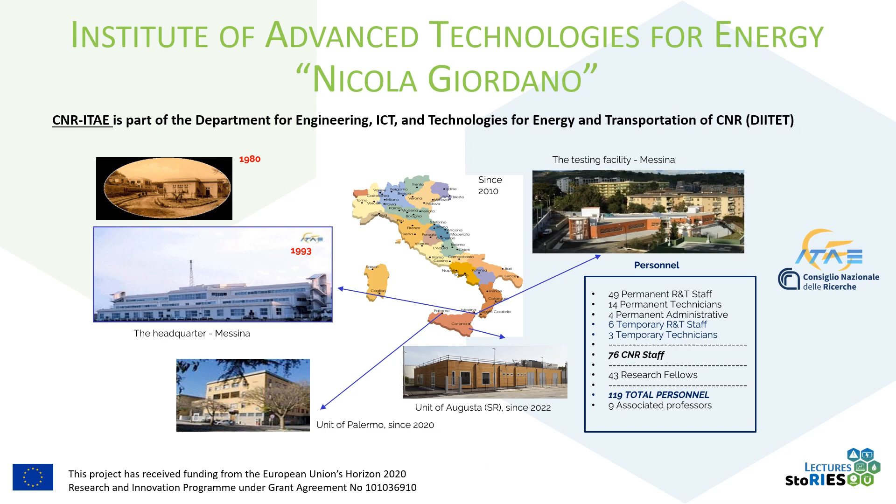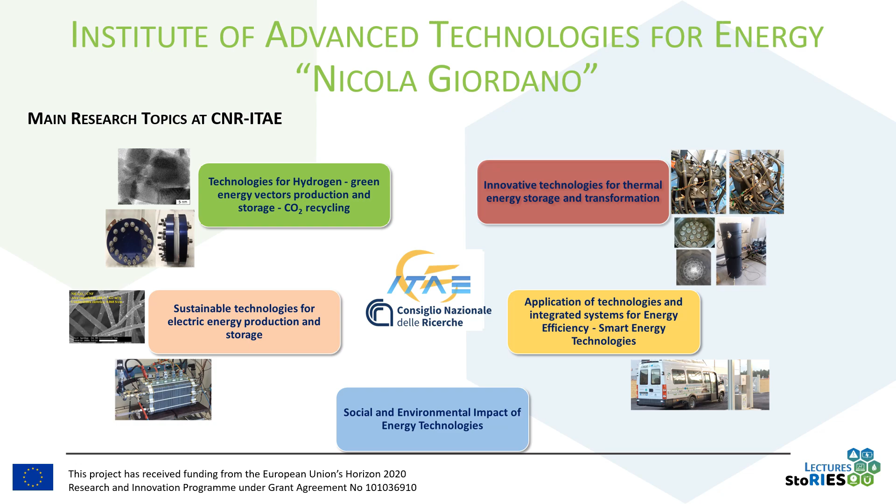Our institute is dedicated to advancing research and innovation in the energy sector. Its activities focus on the development and optimization of sustainable energy technologies, including hydrogen production, CO2 recycling, fuel cell, energy storage solutions, and social and environmental impacts. The institute is active in many research projects in the framework of European, national, and regional research programs in the area of clean energy.

Now let me give you some very little information on my research team. Our activities are developed within the framework of two main topics: chemical energy storage, carbon dioxide recycling, and hydrogen carrier, and hydrogen production from fossil fuels and renewable fuels like biogas, bioethanol, ammonia, and methanol. We are involved in the intensification of thermochemical processes in general, and we are also involved in several projects, European, national, and regional, in which we develop catalysts, especially structured catalytic systems like 3D printed catalysts. We developed also reactors and we scale up also catalysts, and finally we develop also prototypes. I'm the head of this team, and do not hesitate to contact me for further information.

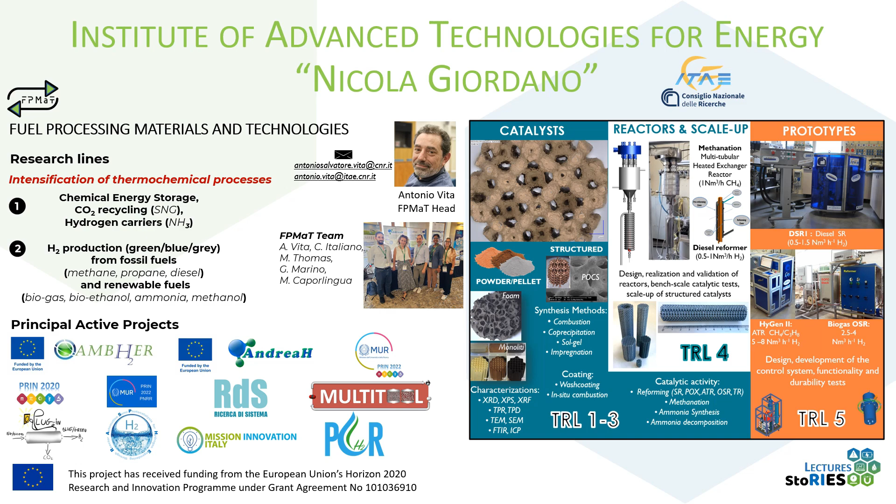The demand for energy is growing across many countries in the world as people get richer, and especially as population increases. If this increased demand is not offset by improvement in energy efficiency, then our global energy consumption will continue to grow year on year.

A breakdown of global energy production by source shows that today fossil fuels still account for the majority, around 77% more or less of global energy comes from oil, coal, and natural gas. Despite the increasing focus on cleaner sources, the contribution of renewable energy now accounts for around 20%. Instead, nuclear energy represents roughly 3% of the total.

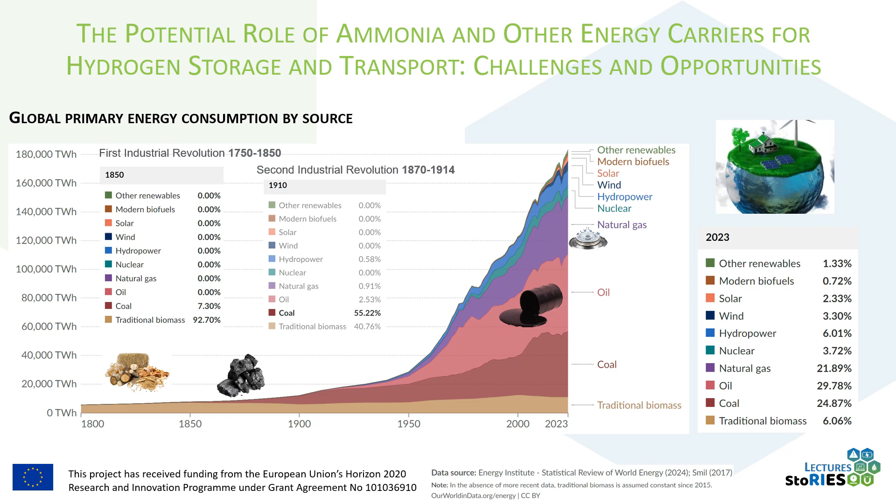So we can say that human activity is responsible for the vast consumption of energy, primarily from fossil fuel, leading to significant pollution and environmental degradation which intensifies climate change. It's widely recognized that to avoid the worst impact of climate change, the world needs to urgently reduce emissions. But how this responsibility is shared between regions, countries, and individuals has been an endless point of contention in many international discussions.

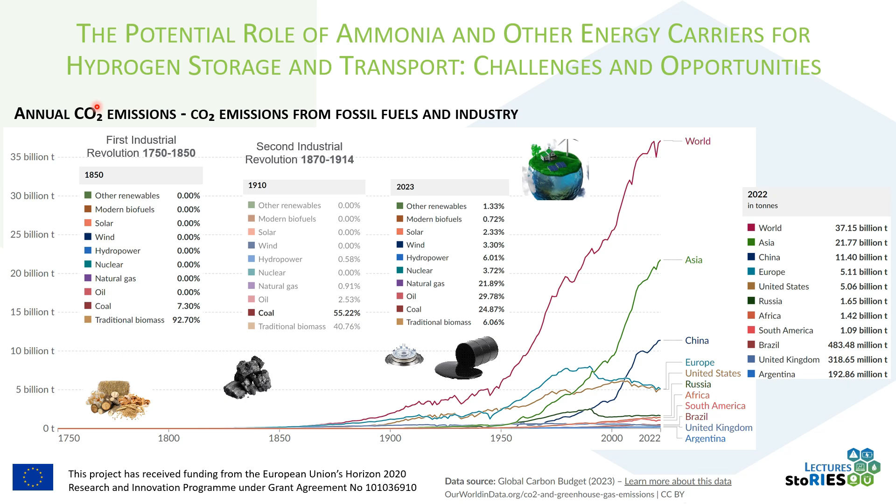The European Union aims to be climate neutral by 2050. With this sign, the European Union will lead the way by investing in clean technology solutions. The window to reach zero emission by 2050 is quickly closing, but there is still time for the world to get on track. If decisive action is taken now, if we want to reach net zero, we need to stop using fossil fuel and cut emissions right away across the world's global energy system, including power, transport, industry, and buildings.

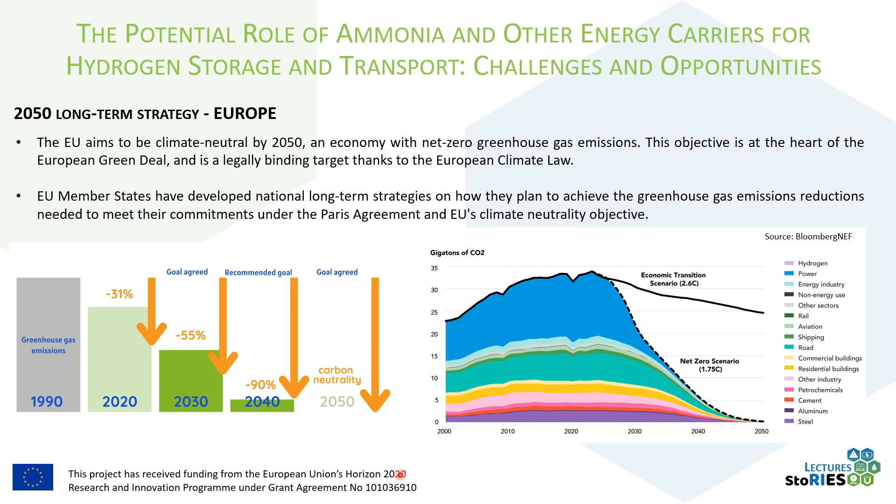There is no doubt that renewables are the future of power generation in Europe and worldwide. Reaching net zero depends on tripling renewables capacity by the end of this decade. We can say that the era of fossil fuels is ending or near to end. Even if the transition is driven by economic aspects alone, renewables could still generate 50% of electricity by the end of this decade.

Continuing to move away from fossil fuels will also require investment in clean technologies to accelerate the adoption of renewable energy sources and the removal of carbon dioxide from the atmosphere for storage and use in industrial processes.

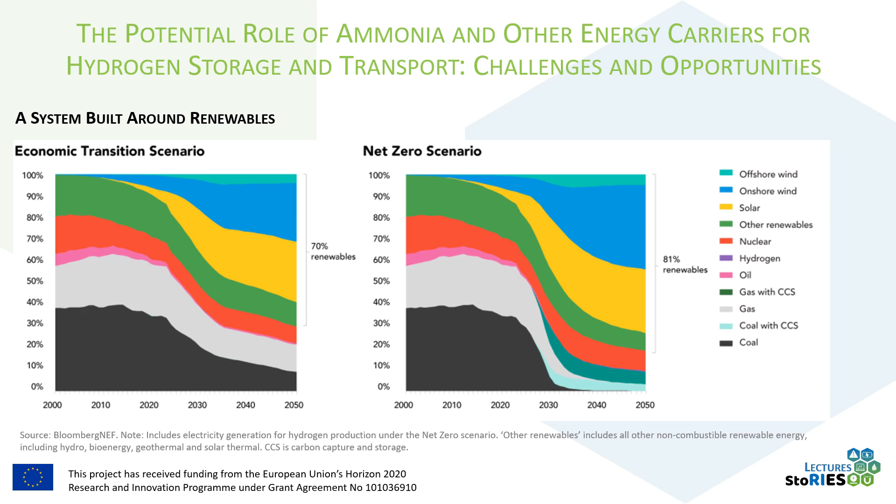Most renewable energy power generation is location dependent. Renewable electricity generation is sensitive to weather conditions, and guaranteeing the amount of energy produced at any given time is a challenge. Intermittency highlights the need for energy storage solutions.

Batteries, for example, are required to collect energy during peak production periods for distribution in a controlled, consistent manner during periods of low or non-production.

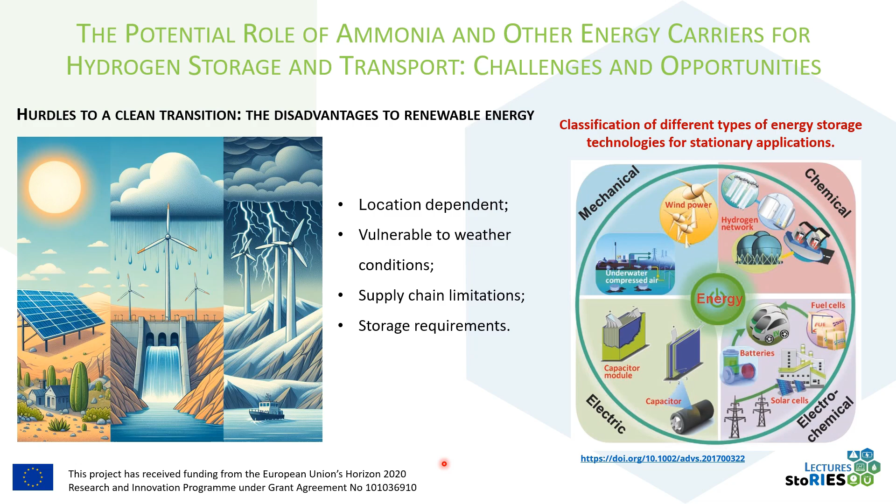But also chemical storage, via molecules like hydrogen and hydrogen derivatives such as ammonia, methanol, and methane, can play a key role to manage excess energy and use part of the carbon dioxide sequestered.

Chemical storage can add power into the grid and store excess power from the grid for later use. We are talking about power-to-gas or power-to-liquid technologies. For instance,

a way to stabilize the energy sector could be to use water electrolysis to produce hydrogen in periods with excess electricity production. Then the hydrogen could be used for applications to decarbonize industry, transport, heating, and power generation.

On the negative side, the major challenge for the direct use of hydrogen as an energy carrier is the low volumetric energy density.

But hydrogen can be used in the synthesis of other storage molecules with higher volumetric hydrogen storage density and higher gravimetric hydrogen storage density, like, for example, ammonia and methanol, that can be stored and transported for application in industry, transport, heating, and power generation sectors.

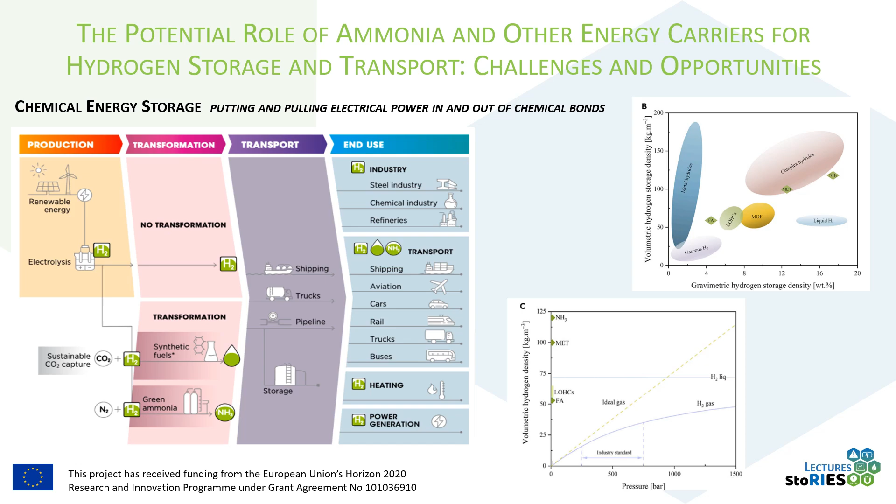As just said, the renewable power is intermittent and thus not always available when needed. Consequently, we need tremendous conversion and storage capacity in order to have a continuous energy supply. Direct electrification is the best option for energy conversion efficiency and zero tank-to-wheel emissions, but the low energy density of battery electric storage systems make them unsuitable for large energy storage, such as in the maritime sector.

Direct use of hydrogen, either in compressed or liquefied form, has some advantages. One of them is the fact that it requires a less complicated fuel production process. But even in its liquid form, hydrogen has a relatively low energy density compared to other synthetic fuels.

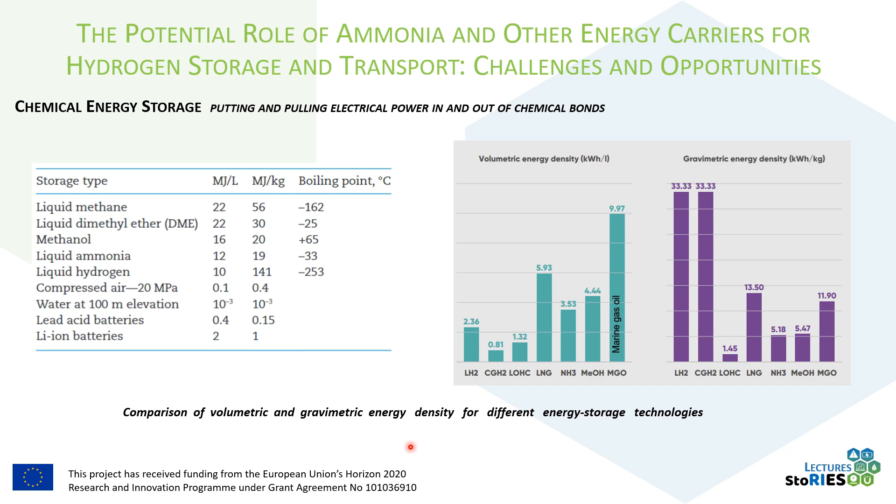The maritime sector offers a scenario in which these emerging carriers can be compared. Hydrogen, ammonia, and methanol, for example, have been proposed as promising energy carriers that would replace part of the liquefied natural gas in future maritime scenarios.

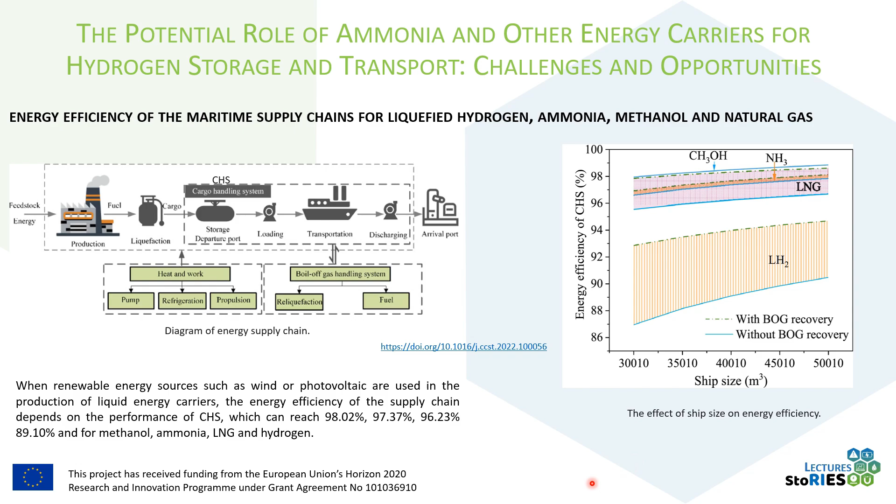In the next slides, I'm going to give details on ammonia: applications, properties, synthesis, and production costs.

Ammonia has a very high hydrogen density, approximately 121 kilograms of hydrogen per cubic meter, in liquid form at minus 33 degrees centigrade under atmospheric pressure. This value is higher compared with other potential carriers like methanol or liquid hydrogen.

Many experts suggest that using ammonia as a temporary vector for hydrogen will be needed to overcome the storage and transport challenges associated with hydrogen.

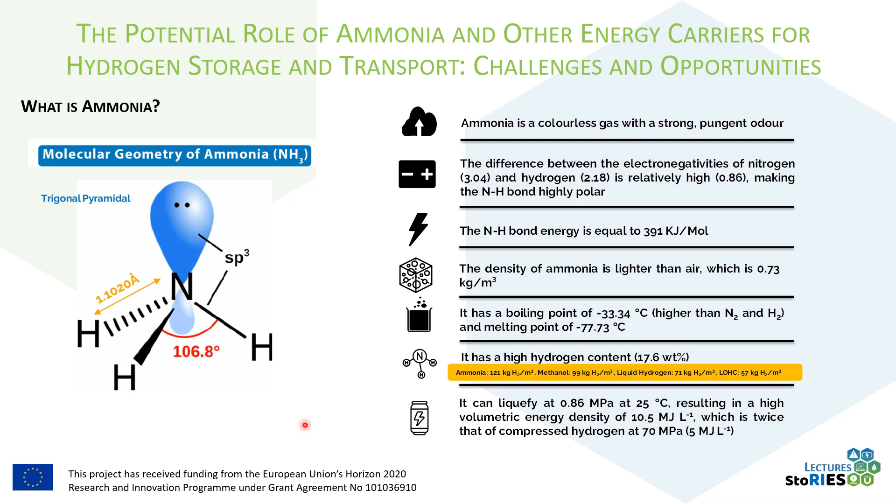Today, about 80% of the annually produced ammonia is used for fertilizer production. But ammonia is also used for the textile industry, explosive industries, and cosmetic industry.

Ammonia production normally increases with the increase of population, and in the future ammonia production will increase much more, driven by economic and population growth. This number will increase even more if we consider the application of ammonia in the energy sector as an energy carrier.

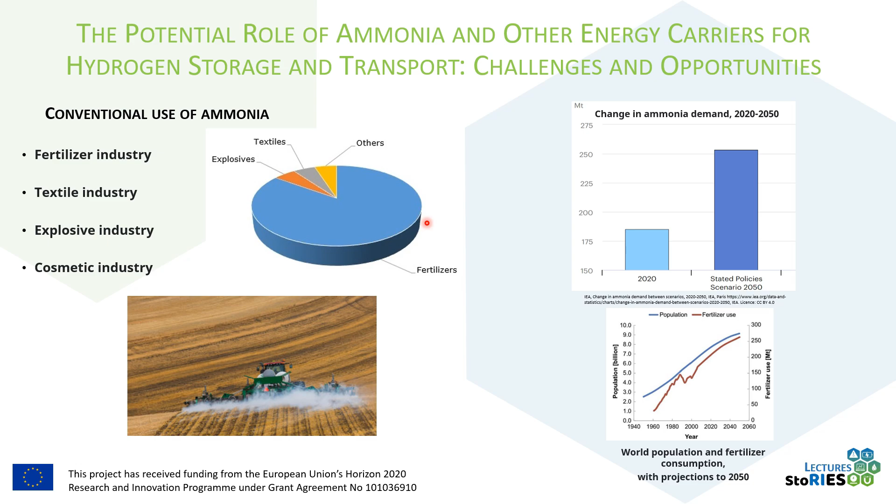China is the largest producer of ammonia, accounting for 27% of production. Then we have other countries like the United States, European Union, India, and Russia, that produce about 10% of ammonia.

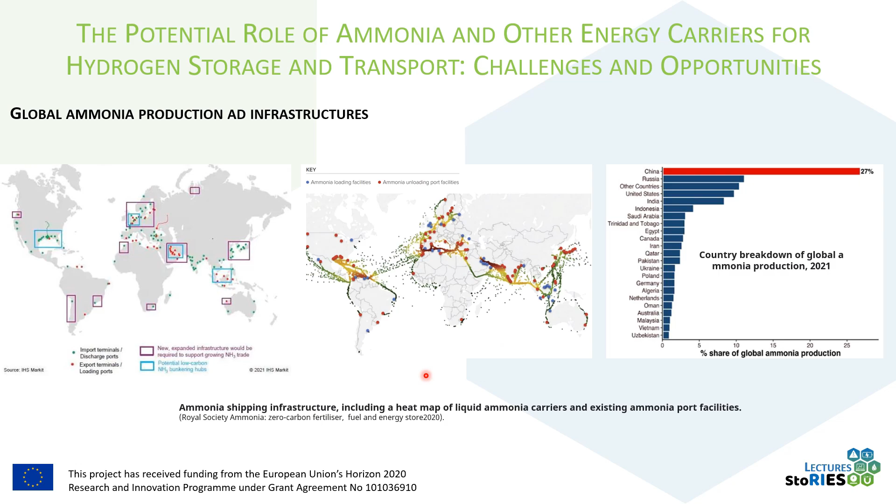One of the advantages of using ammonia as an energy carrier is the well-established international existing infrastructure for ammonia transportation and storage. There is a comprehensive network of facilities around the world that can handle ammonia on a large scale. This well-established infrastructure can also be used to transport ammonia for energy application.

The Haber-Bosch process is the primary method for producing ammonia from nitrogen and hydrogen. Fritz Haber and Karl Bosch, both Nobel Prize winners in chemistry, worked together more than 100 years ago to develop this important process. Fritz Haber was the first to demonstrate the process at lab scale, working with high temperature, 500 degrees centigrade, and high pressure, between 150 and 200 atmospheres.

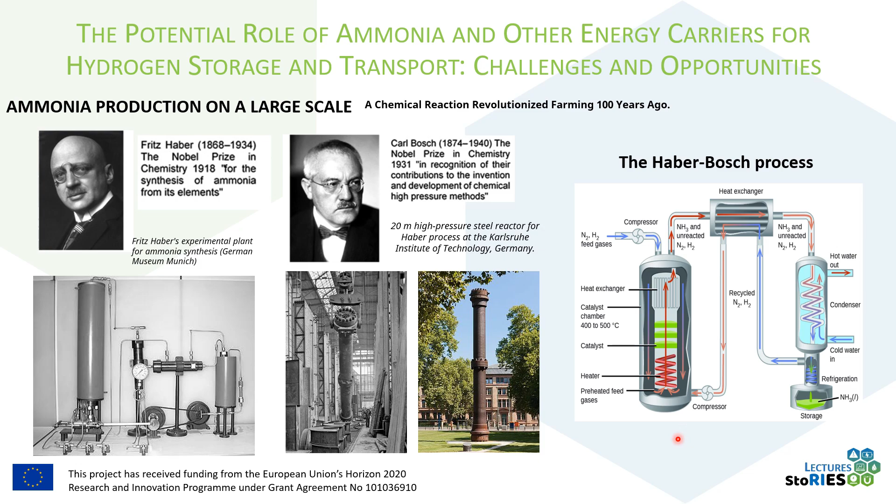The ammonia synthesis is a reversible reaction. It can proceed both in the forward direction, ammonia synthesis, and in the backward direction, ammonia decomposition.

The reaction is characterized by decreasing volume, so increasing the pressure causes the equilibrium to shift to the right, resulting in higher ammonia production. Decreasing the temperature also causes the equilibrium to move to the right, resulting in a higher yield of ammonia, since the reaction is exothermic. The reaction does not proceed at ambient temperature, because nitrogen requires a lot of energy to dissociate.

The use of catalysts, of course, accelerates the reaction. If we look on the right, we see an image of the ammonia converter. Modern ammonia converters today combine the catalyst section with the heat exchanger section to achieve the desired temperature profile, to strike a balance between higher rates of reaction and constraints posed by equilibrium considerations. The result is that, in the end, ammonia productivity increases.

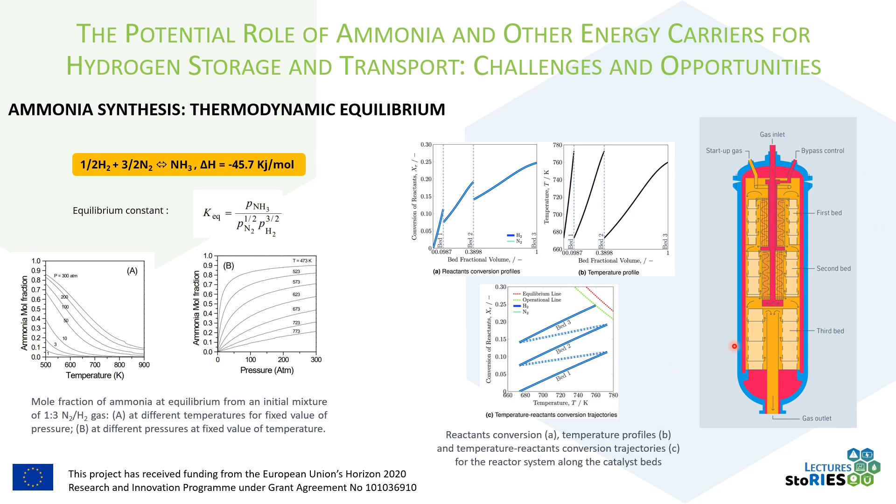Fused iron catalyst is the most studied and widely used catalyst for the ammonia synthesis process. This catalyst is derived from three different kinds of iron oxide: wüstite, magnetite, and hematite. The catalysts are produced in the same way today. Exact ratios of starting materials are mixed together and fused at around 1600 degrees centigrade. The main differences are the additional promoter, type of promoter, and amount of promoter.

The general mechanism for ammonia synthesis that comes from experimental activities is the Langmuir-Hinshelwood mechanism. The mechanism proceeds via the adsorption of dinitrogen onto the catalyst surface. This is followed by dissociation of adsorbed nitrogen atoms, which is the rate determining step.

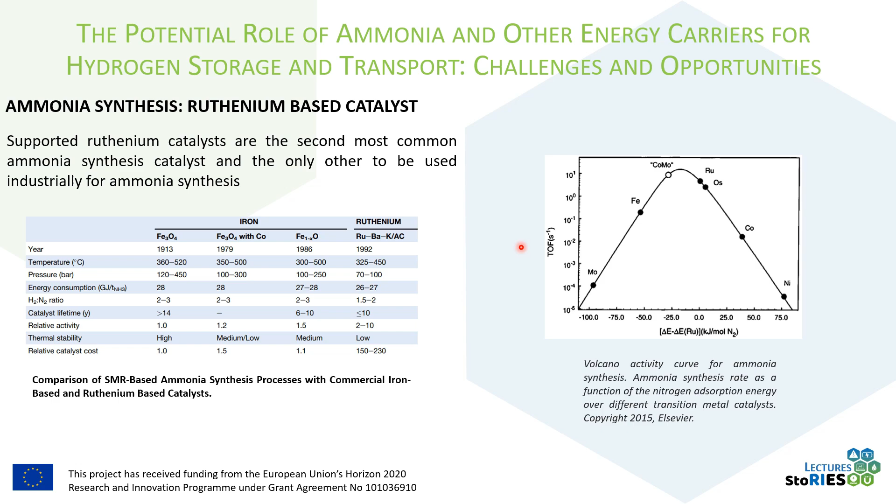Most ammonia plants rely on the steam reformation of natural gas to produce hydrogen for the synthesis loop. But the steam reforming of methane also produces carbon dioxide. Coal, heavy fuel oil, and naphtha can also be used, but they have higher carbon dioxide emissions compared to natural gas. This process is intensive in terms of energy consumption. It's an energy-hungry process, but also has a significant environmental impact.

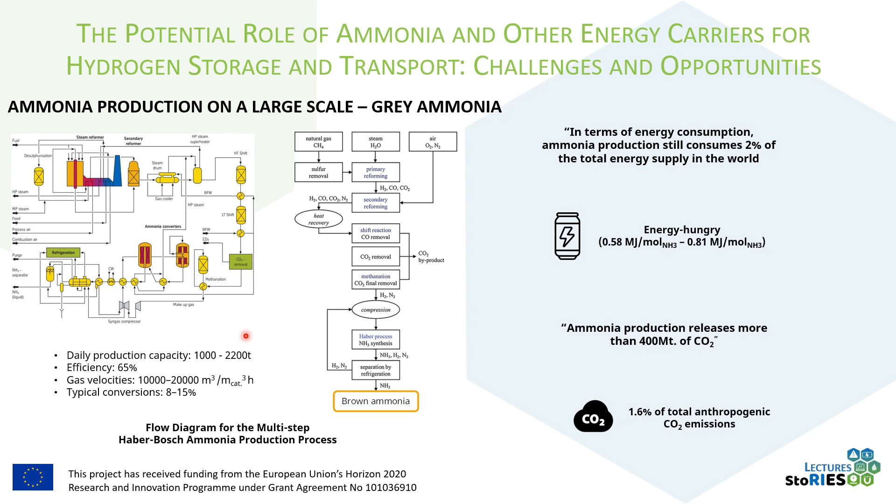1.6% of total anthropogenic carbon dioxide emissions come from the synthesis of ammonia. And if we look at the hydrogen produced in the steam reforming plant for the synthesis loop, hydrogen accounts for around 19% of the carbon emissions in the synthesis of ammonia.

Reducing the amount of carbon dioxide produced during the manufacturing process is dependent primarily on the source of hydrogen. In this case, it depends on the reforming loop.

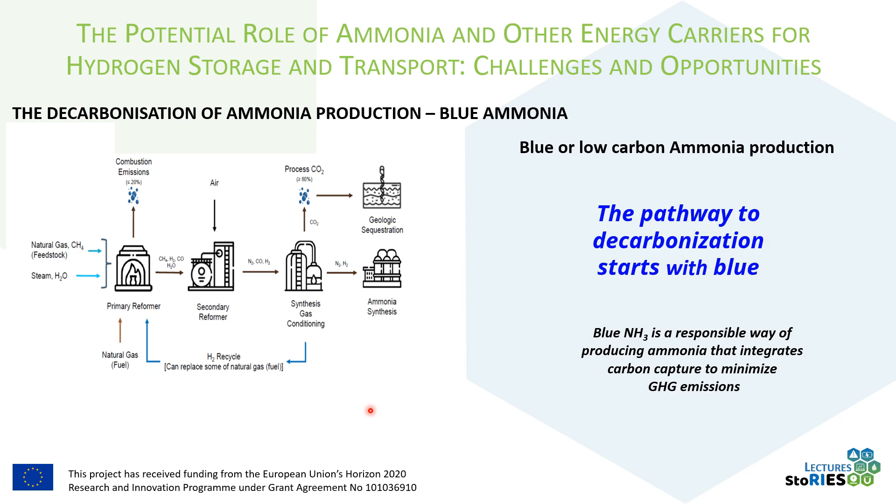Steam methane reforming emits carbon dioxide in a concentrated form that is well suited for carbon capture and storage. Up to 90% of carbon dioxide could be captured in this process. But although this degree of carbon emission reduction is impressive, for net zero carbon hydrogen production, current projections suggest that this process can only be part of the transition to a zero carbon solution.

This reliance on fossil fuels, natural gas principally, for hydrogen production is why many ammonia plants are looking towards green hydrogen alternatives. Green hydrogen produced via water electrolysis using renewable energy sources eliminates carbon dioxide emissions and offers a more sustainable pathway for ammonia production.

The interest in green ammonia produced using green hydrogen is driven by the need to decarbonize current ammonia production for its existing uses, and by the potential of ammonia to serve as an economically viable carrier for long-distance transportation of green hydrogen.

Distributed green ammonia plants will offer liquid storage of renewable electricity at ambient pressure, and ammonia can then be safely transported by ship, road, or rail to the user.

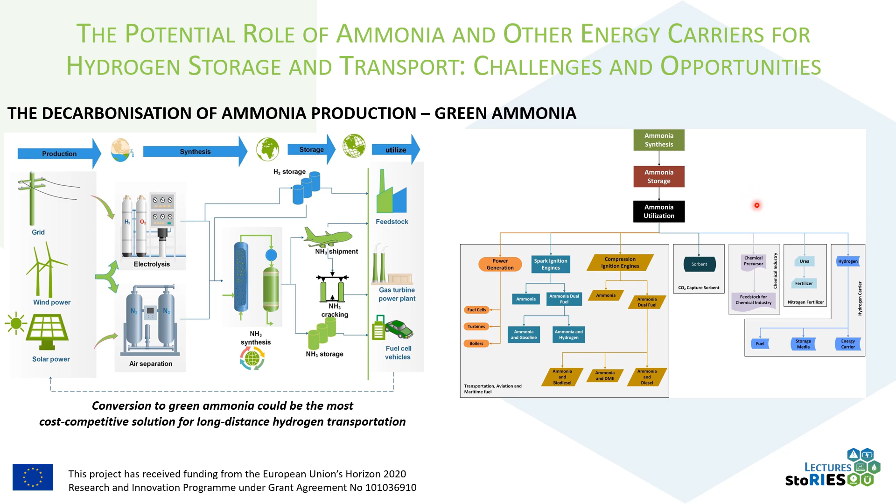The design of green ammonia plants seems simpler compared with the conventional Haber-Bosch process, in which the synthesis loop is integrated with a steam reformer. Here we have an electrolyzer to produce hydrogen, then the loop for the synthesis of ammonia is similar to the loop used in a conventional plant. But the transition from conventional ammonia to green ammonia presents several challenges.

The economic part is important. The capital expenditure for a green ammonia production plant is dominated by the electrolyzer cost. Moreover, the energy supply for green hydrogen feedstock is greater than the electricity demand for the Haber-Bosch process.

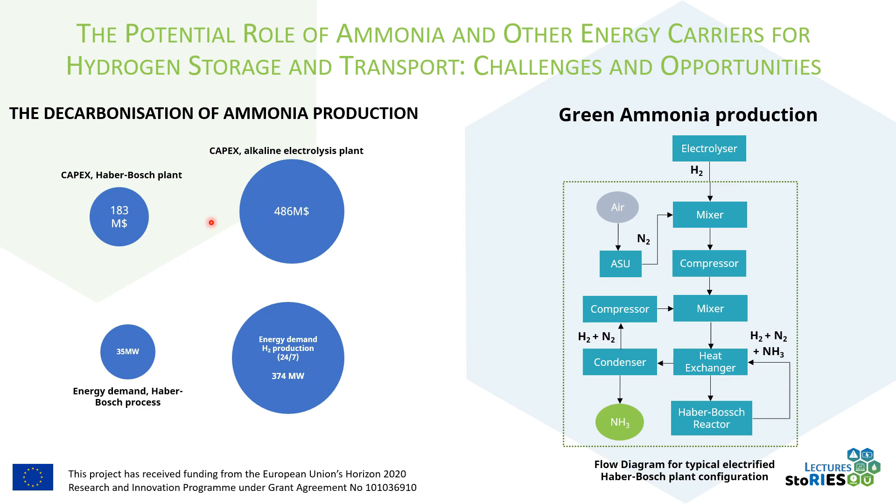Renewable sources of energy such as biomass, solar, wind, or geothermal are characterized by highly distributed production across regions. Distributed production corresponds to production at small scale. For green ammonia production, the step forward is to downsize a large-scale plant through modularization.

So milder operating conditions in the synthesis loop are required for effective scale down. New reactor configurations, alternative to traditional packed bed reactors, should be developed to operate at lower temperature, under 500 degrees centigrade, and lower pressure, under 100 bar, compared to conventional catalytic beds.

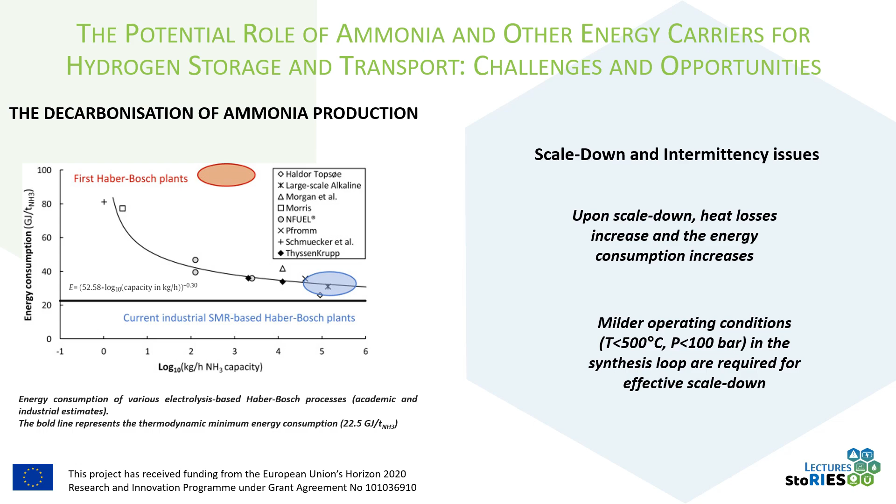The cost of ammonia production is characterized by several contributions. We have to consider carbon dioxide emission, electricity, cost of natural gas, maintenance, and capex.

As natural gas consumption for steam methane reforming is the most energy-intensive step in the traditional ammonia manufacturing process, it is not surprising that ammonia production costs are strongly correlated to natural gas price. As natural gas price increases, the cost of gray ammonia production rises dramatically. Another important cost element is the cost of carbon dioxide emission, adding around 12% of the cost.

For blue ammonia, we have to consider the cost of carbon dioxide transport and storage. But also in this case, when hydrogen is produced from steam reforming of methane, the levelized cost of ammonia increases with the cost of natural gas.

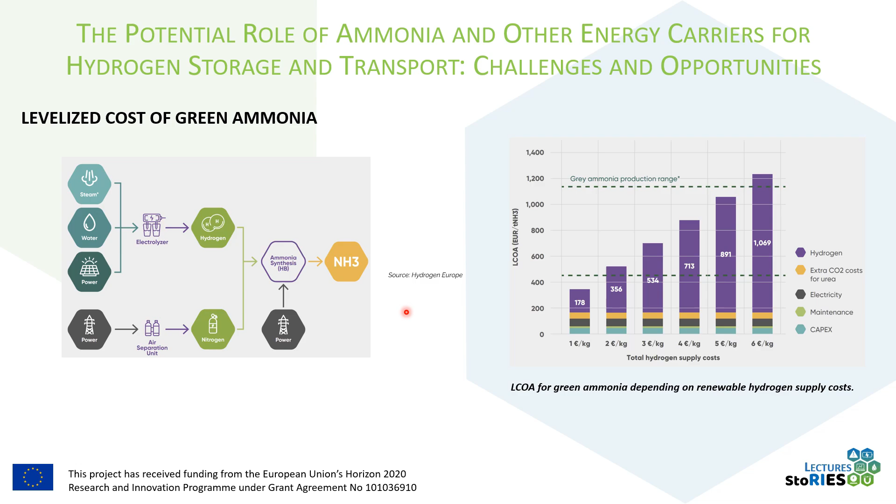The cost of green hydrogen has a direct and substantial effect on the cost of green ammonia. In a fully electrified ammonia production, based on hydrogen produced via water electrolysis, the hydrogen supply cost would be by far the dominant cost item, as shown by this graphic. For example, if we fix the natural gas price at €50 per megawatt hour, the break-even point for green hydrogen supply costs would be around €3 per kilogram.

So, in general, we could say that with hydrogen supply costs expected to decrease in the coming years due to technological advancement and scaling of renewable energy, the cost of green ammonia could become competitive with traditional fossil-based ammonia production.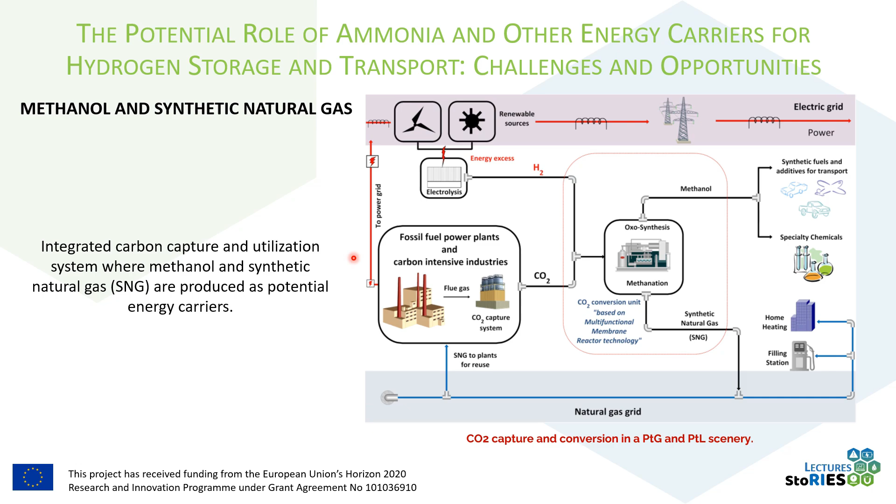Methanol has the potential to serve as a significant energy carrier, thanks to its wide range of applications across various industries. Methanol is used in sectors such as automotive, maritime, aviation, construction, electronics, pharmaceutical, and plastic, demonstrating its flexibility and adaptability.

As shown in the slide before, it can be synthesized from captured carbon dioxide and hydrogen produced from renewable sources, supporting a circular carbon economy. This makes methanol not only an efficient means of storing and transporting energy, but also a key component in reducing greenhouse gas emissions and promoting renewable energy integration across multiple sectors.

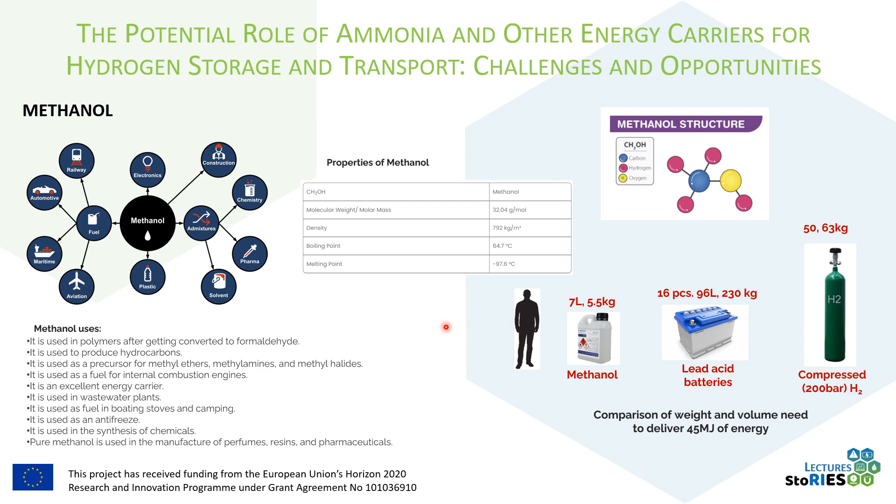On the right is shown a comparison of weight and volume needed to deliver 45 megajoules of energy. Due to its properties by volume and weight, methanol requires the least volume and weight, while batteries and hydrogen need significantly more due to their lower volumetric energy density.

Methane is the most popular hydrocarbon used as a fuel. It is an important carrier for electricity generation and heat production. In comparison with hydrogen, it has a higher volumetric energy content and, most importantly, is much safer. Methane is a clean fuel compared to other hydrocarbons since it emits less carbon dioxide per unit of heat produced.

If green energy and a source of carbon dioxide are available, a prime route to sustainability is the production of synthetic natural gas by methanation. Carbon dioxide is captured and the gas can be directly used in our existing gas grid.

The gas grid may be the largest energy storage system which is already in place. It is in fact easier and cheaper to use existing infrastructure such as the gas grid to store large quantities of energy. Just think of wintertime in Europe or other periods without the necessary wind or sunshine. Here, scale and size is important.

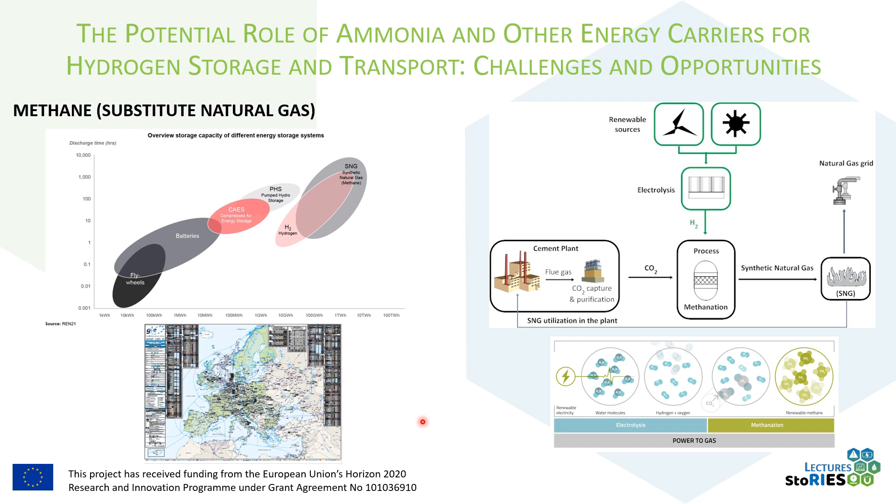Liquid organic hydrogen carrier technology is a method for hydrogen transport and storage that involves bonding hydrogen molecules to a stable liquid carrier compound.

Hydrogen is produced by electrolysis and through the hydrogenation process can be stored in a carrier that can be transported for the dehydrogenation process at the final use, and then the carrier is transported back to the hydrogen source for reuse. There are a lot of organic hydrogen carriers that can be used with different properties for the hydrogenation and dehydrogenation steps: temperature, pressure, amount of hydrogen loaded.

Unlike compressed or liquefied hydrogen, the liquid organic hydrogen carrier enables hydrogen to be stored in a liquid at ambient temperature and pressure, significantly reducing the infrastructure and energy requirements for handling and transporting it. This storage and transport concept is used to connect regions with large energy generation potential from renewable sources and low electricity demand to regions with high energy demand and lower energy provision potential.

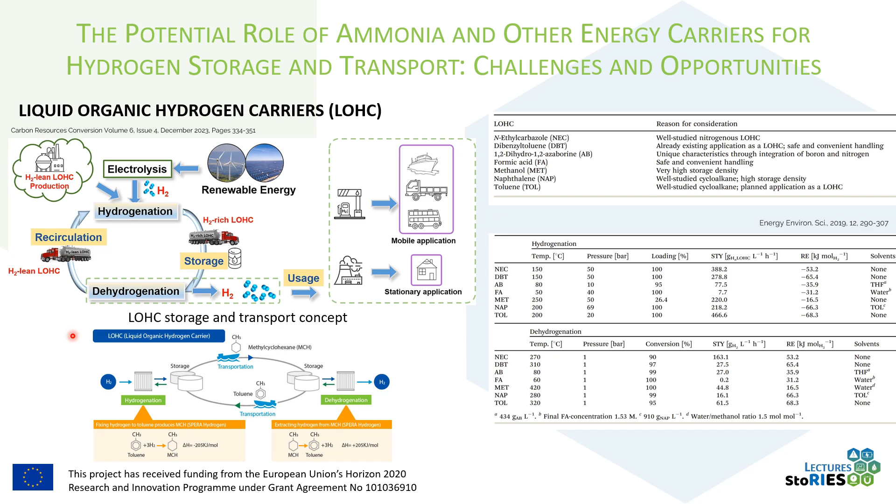The principal challenges of the liquid organic hydrogen carrier are the energy for hydrogen release. The dehydrogenation process, which releases hydrogen from the carrier, often requires significant heat or catalytic processing, adding to the cost. Also, carrier handling is important: the carrier must be transported back to the hydrogen source for reuse, adding a logistic step to the process. And finally, there are inherent energy losses in the loading and unloading process, which can impact the overall efficiency.

This slide focuses on the comparison of different hydrogen carriers in terms of hydrogen delivery cost. The cost of hydrogen delivery depends on several factors: the amount of hydrogen transported, the transport distance, and also packaging. Packaging refers to the form in which hydrogen is delivered, such as the compression or liquefaction of hydrogen, or its conversion to a chemical carrier like ammonia, methanol, or synthetic natural gas. Then we have unpacking, which means reversing the process to have purified hydrogen at the defined pressure and purity at the use case.

This chart illustrates the delivery costs for various hydrogen transport methods: compressed hydrogen, liquefied hydrogen, ammonia, methanol, and liquid organic hydrogen carrier in different configurations. Each bar represents the delivery cost in euros per kilogram of hydrogen, broken down into components: transport plus storage, packing, unpacking, carrier, and hydrogen losses. The price of electricity is also included, with high price and low price scenarios.

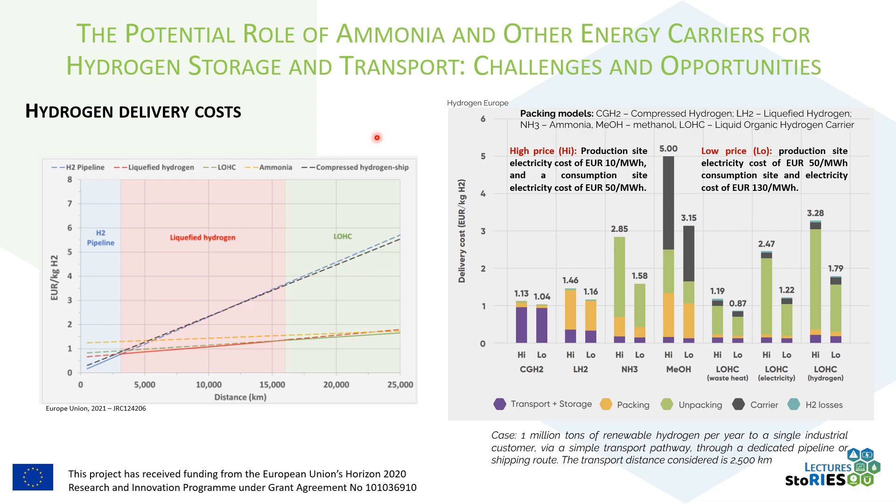And now the conclusion of this presentation, which focuses on the potential role of ammonia and other energy carriers for hydrogen storage and transport, challenges and opportunities. We can say that there are several key factors that need to be considered to identify the best hydrogen carrier: hydrogen carrier production, hydrogen release, recyclability of hydrogen carrier, application size, infrastructure network, policy, geographical position, and transport length.

The best hydrogen carrier depends on the application and context. For example, ammonia and liquid organic hydrogen carriers are good options for long distance, large scale applications with existing infrastructure, while methanol and synthetic methane provide flexibility and ease of use with existing energy networks. Finally, compressed and liquefied hydrogen are useful options for shorter distances where pure hydrogen is needed immediately.

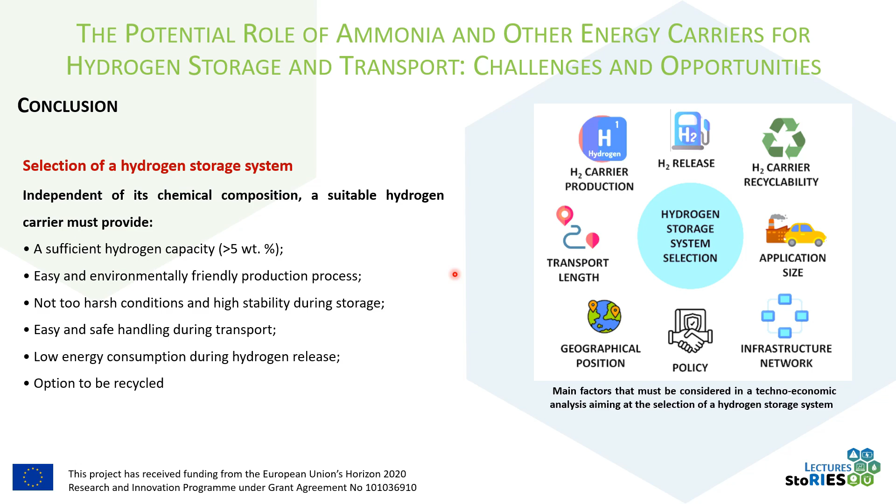In conclusion, I would like to thank everyone for your attention and for following the presentation from beginning to end. I hope this presentation has provided valuable insight into the potential and challenges of different hydrogen storage and transport methods.